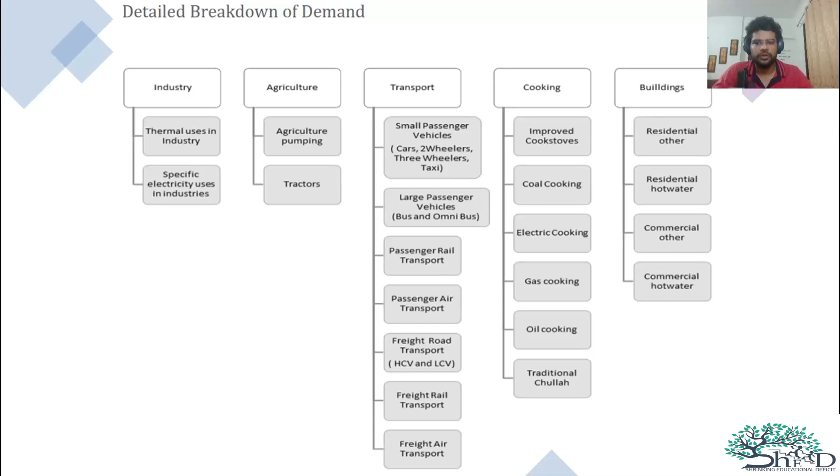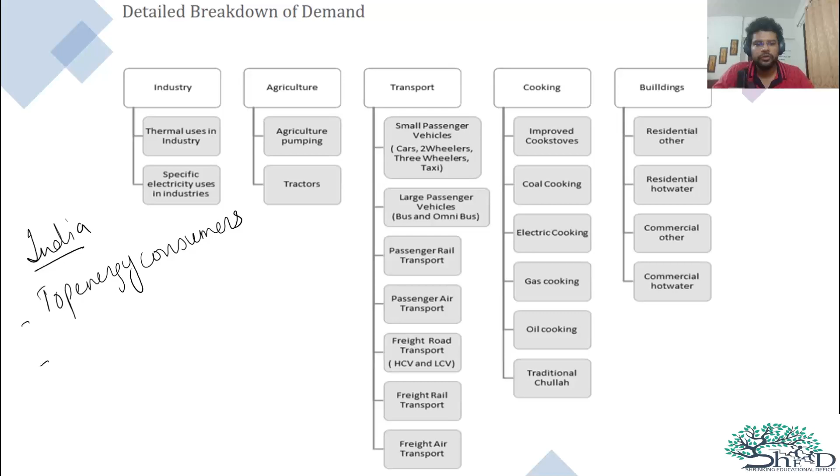Before beginning, I would like to give you some brief background, especially with regards to India. India currently ranks as one of the top energy consumers in the world, and with our population and GDP increasing, our energy demand will most probably increase in the next 5-10 years, and consequently greenhouse gas emissions will also rise.

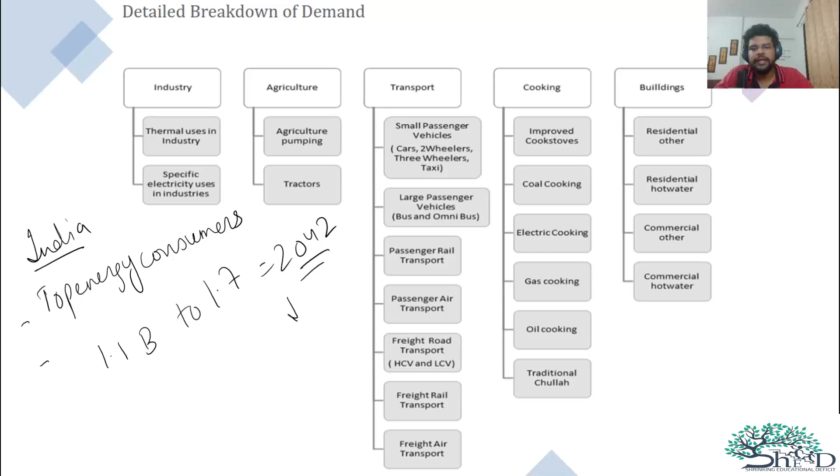Our population is expected to go from 1.1 billion to 1.7 billion by 2042. This is a United Nations estimate from 2017. And if we keep increasing our population like this, we will overtake China by 2025, which is also a UN estimate.

Now, most of this growth in population will happen in cities, not in villages, because of which urbanization will also increase. As seen here, it will lead to the following demands, which we'll see in the image.

So what is the result of this? Basically our energy consumption will increase - energy from agriculture will increase, demand from industry will increase, from transport will increase, from cooking, for buildings. Energy for construction and manufacturing will also be increasing in demand.

In industry, the demands will be from thermal uses or specific electrical uses. In agriculture, water pumping, tractors. And energy does not just mean electricity - energy means oil also. In transportation, we will see air transport, railway transport, freight transport, all increasing.

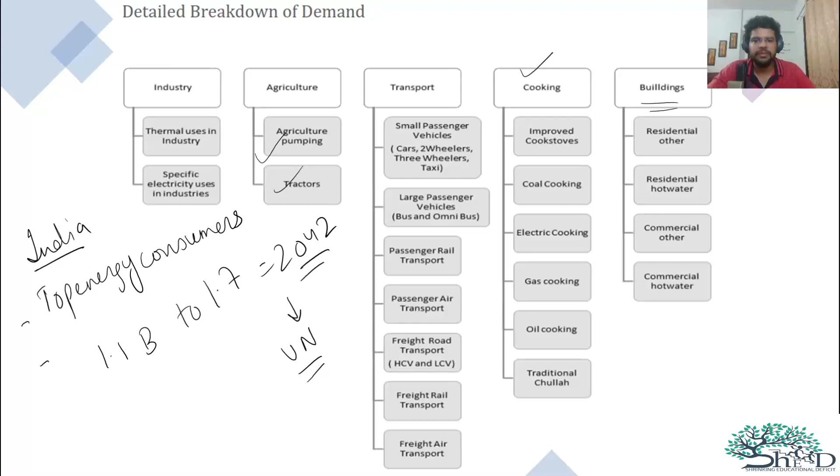In cooking, we will see less usage of coal, more usage of LPG, electrical cooking, and so on. In buildings, we will see residential, hot water requirements, commercial buildings with offices. So all these things will be increasing demand in the coming years. Please remember this perspective before reading anything related to energy.

But if we talk about renewable energy, our progress has been very nice, very good. We have seen a rapid increase in renewable energy sources. For example, from 2013 to 2019, wind, solar, hydro, and biomass have all increased.

Most of the growth you will see has happened in wind and solar. Almost the same growth is happening in hydro. A little bit of growth is there in biomass, but most of the growth has occurred in wind and solar, and most in solar. So that is what you can see from the graph. This is also something you can use in your arguments.

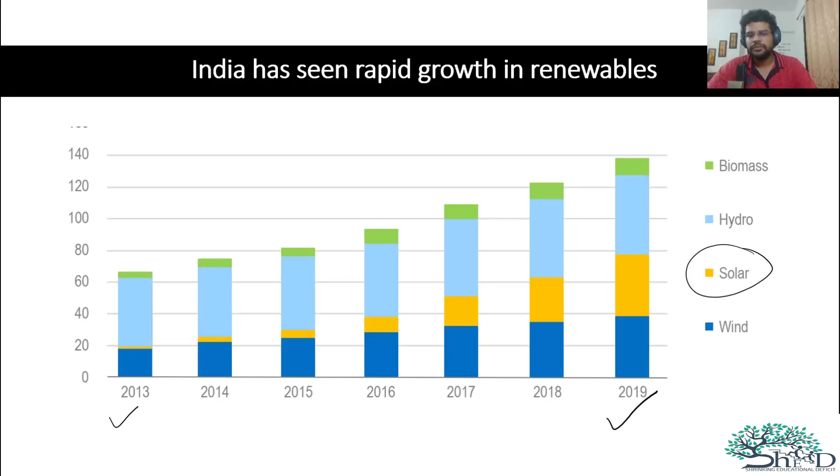So what are the recommendations for the overall India's energy sector? Now I'm not talking about any particular energy source, I'm talking about the overall energy sector of India.

First of all, we need to keep promoting the energy investments that are currently going on. We need proper regulation, proper foresight by policymakers. We need policies that do not change when the government changes - a stable regulatory framework for all players in the market.

We need to move toward market pricing for energy commodities, meaning subsidies should reduce. But this cannot be reduced for everybody - for some people who deserve it, they should still be provided with subsidies.

Prioritize action to foster energy security - meaning we get the energy we want whenever we want, without waiting for another country to provide it. The central government needs to work with state governments to increase renewables, and we need to boost the flexibility.

We need to improve our emergency oil storage according to international best practices. We need to create a natural gas market in the country with good infrastructure of gas, which can be done by increasing supply of LPG, petrol, and piped gas in rural and semi-urban areas.

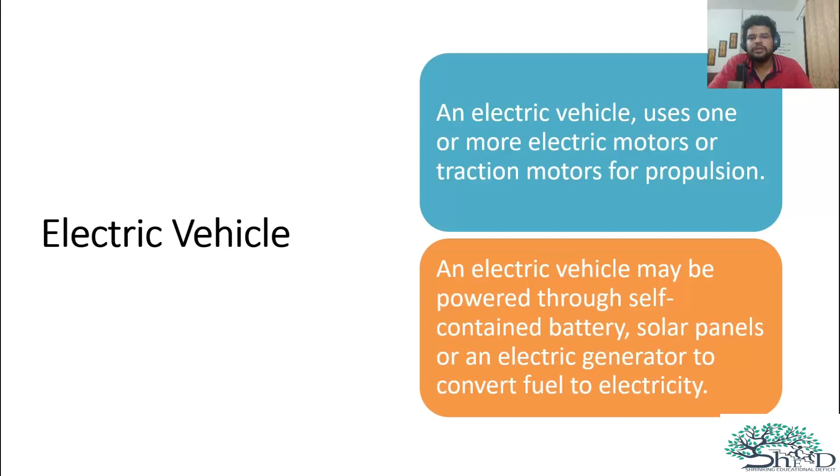It might be powered by batteries, or it can have solar panels also, or even a generator, so that it can use diesel or some other fuel to generate the electricity. We'll see the types of fuels.

One of the most important technologies in this is fuel cell technology. A fuel cell is basically a device that generates electricity by chemical reaction. Very simple definition - a fuel cell is a device that generates electricity by chemical reaction. It uses the chemical energy of hydrogen.

Fuel cells can be used in a variety of applications - they can be used in transport, in backup power, in cars, and even at some stage in the future they might be able to power your homes also.

Since we are talking about electrical vehicles - in cars, fuel cells can operate at a better efficiency than a combustion engine. That means 1 liter of hydrogen will produce more energy compared to 1 liter of petrol. They also do not have any harmful emissions. Hydrogen fuel cells emit only water, so there is basically no carbon dioxide emission, and the pollutants that create smog are due to combustion engines.

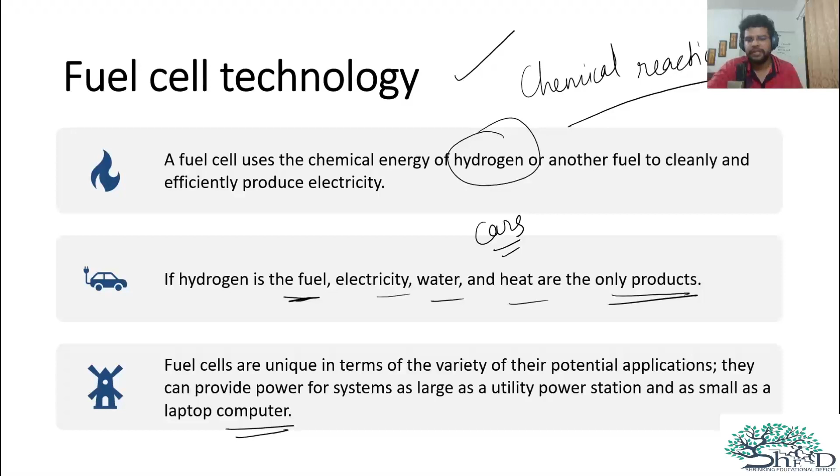They are very unique. They have zero pollution, very less noise, very few moving parts. So ultimately it is very beneficial to use.

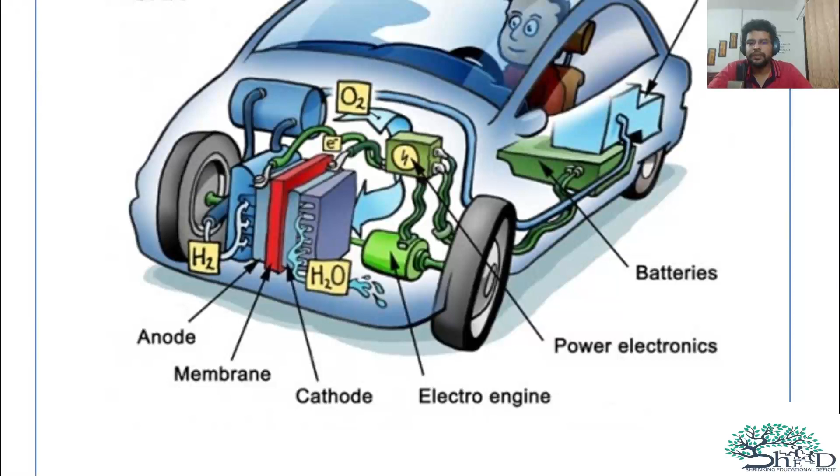Now let's see this image. Fuel cells will sit in a car like this. This will be the fuel cell that will produce the energy, and the battery in the car will store it, and the battery will keep recharging. At the place where the engine is, there will be the fuel cell, and that will produce the energy on the go.

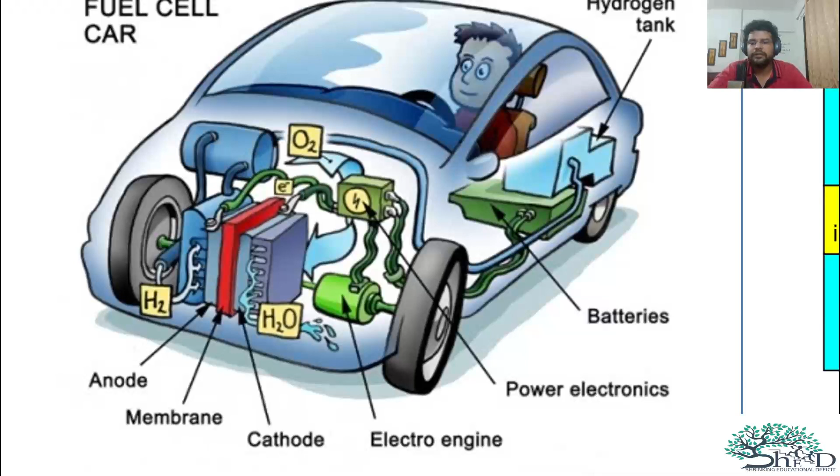For emergencies, the battery will be charged. Like nowadays, even scooties, cars, and bikes have batteries to start. Almost every vehicle today has a small battery, but that is used only in emergencies and for first ignition. But here, at the place of the engine, the fuel cell will be placed, and it will run whenever the car is running, with a battery also in case of emergency or if there is any problem in the fuel cell.

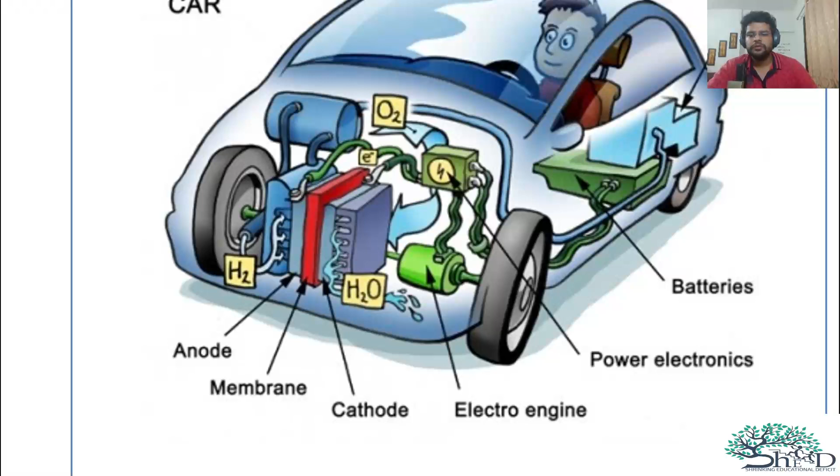So a fuel cell will work like a battery, but they don't get charged. They run on fuel - they produce electricity and heat as long as hydrogen is provided to them.

Now, in a fuel cell, there are two electrodes - see the right hand side diagram. A fuel cell has two electrodes, a negative electrode and a positive electrode. The negative electrode is the anode and the positive is the cathode. Between these, there will be an electrolyte.

Now let's talk about the fuel, which will be hydrogen. It is given to the anode and air is fed to the cathode. In a hydrogen fuel cell, there will be a catalyst at the anode, and it will break the hydrogen molecules into protons and electrons. These electrons will go to the cathode through the external circuit. This flow of electrons creates the electricity.

So hydrogen will be broken down and the electrons will travel from anode to cathode, and that travel of electrons will create the electricity. Now the protons will go through the electrolyte. As you can see in the diagram, plus ions will go through the electrolyte to the cathode, where they will unite with the oxygen and produce H2O. Getting the point? So this is how the fuel cell will work.

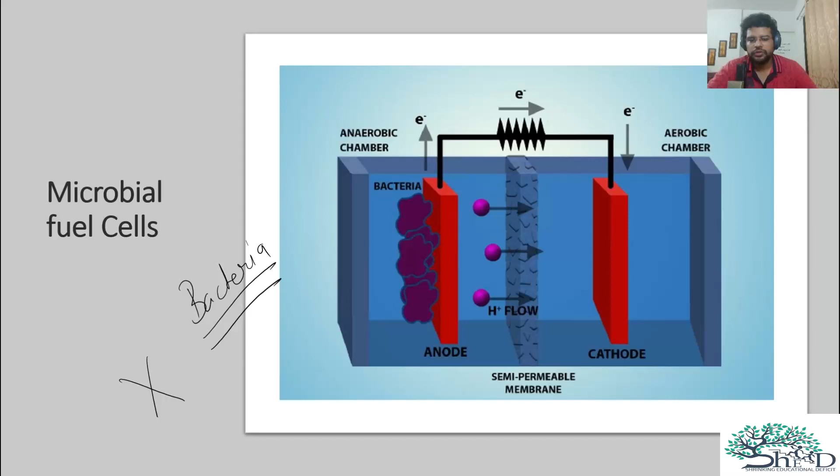Now related to this is the microbial fuel cell. In a microbial fuel cell, at the anode, we will be producing electricity from bacteria. The fuel will be bacteria and not hydrogen. So it is quite a new thing. Let us see how it works.

The Zoological Society of London has used plants to power sensors in the wild, in the jungle, by installing microbial fuel cells. They have installed sensors in wildlife to monitor them and to power that sensor in the jungle using microbial fuel cells.

A microbial fuel cell is a bioelectrochemical device—biological plus electrical plus chemical—that uses the energy generated by respiring microbes to convert the organic part directly into electrical energy. It transforms chemical energy into electricity by using oxidation reduction reactions.

We don't need to go into depth, we just need to see how it works from a high level, not chemically, since that's not part of our GS. It relies on living things to facilitate the movement of electrons. We just need movement of electrons. In the hydrogen fuel cell, it was done by hydrogen; here it is being done by a living organism.

Now, what are the various applications? Where low power is required and where replacing a battery is not very practical, microbial fuel cells can be used—for example, the sensors of the Zoological Society of London.

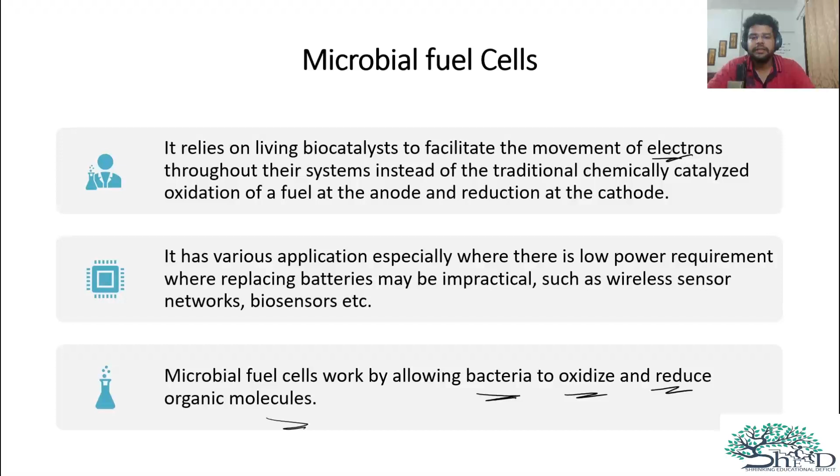Microbial fuel cells work by allowing bacteria to oxidize and reduce organic molecules. So this is how they work. Again, I'm telling you, we don't need to go into depth. We just need to know that such a thing exists, and it converts and starts the chemical reaction by a biological source.

Now, what are the advantages of a fuel cell electric vehicle? I'm not talking about the fuel cell now, but about the electric vehicle powered by a fuel cell. They produce very low greenhouse gases, and whatever byproduct they produce will not cause health problems. Fuel cells emit only heat and water as a byproduct, and are more energy efficient than traditional combustion technologies currently in use.

Fuel cell electric vehicles do not need to be plugged in for charging. This is very important—let me compare it to the vehicles existing right now. Currently, when a car runs on petrol, diesel, or CNG, it charges the small battery that is inside the car.

The fuel cell will basically provide current or energy to the vehicle like a combustion engine provides energy to the motor of the vehicle from petrol. We need energy to rotate the wheels, currently provided by the combustion engine. With the fuel cell, it will replace the combustion engine. It's not like a battery—it will actually produce electricity, and with that electricity the motor of the vehicle will run. Of course, there will also be a backup battery in the fuel cell vehicle, which will be charged and used in an emergency if the fuel cell stops working.

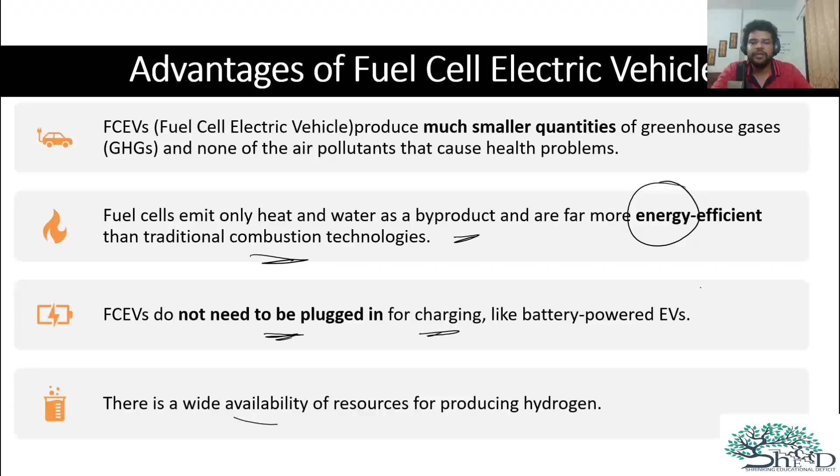And of course, we have wide availability of resources for producing hydrogen, so this is very good. Now, what are the limitations of the hydrogen fuel cell? If energy produced by hydrogen fuel cells is such clean energy, then why are we not using it? Why are we not producing this on a mass scale right now?

See, what are the issues with hydrogen fuel cell technology? The way we need to make hydrogen is mostly through electricity, and that electricity comes from fossil fuel. That is the issue. So we need to prepare hydrogen as a fuel, and that hydrogen needs energy. Basically, the process to create hydrogen needs energy, and that is coming from fossil fuels right now.

Secondly, safety, because it is quite explosive. If not kept properly, hydrogen is quite explosive. Then there is high surface area carbon, which will corrode the vehicle. Rust will come in the vehicle. Then platinum is used in hydrogen fuel cells, which is quite expensive, and its price is a big barrier in wide adoption of hydrogen technology. So these are the limitations: it is quite explosive, then it is corrosive, it is being produced from fossil fuel sources, and the platinum that is used is quite expensive.

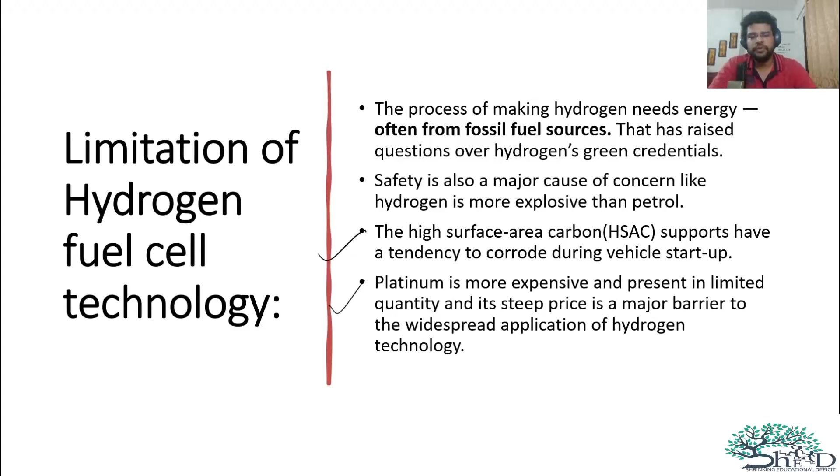So let us now come to the central government initiatives on electrical vehicles and what they are doing to promote electrical vehicles. Government of India has set a target of electrical vehicles making up to 30% of new sales of cars and two-wheelers by 2030. So basically by 2030, 30% of whatever is selling, two-wheeler or four-wheeler, should be electrical vehicle. This is the target set by the Government of India.

Then they want to build a sustainable electrical vehicle ecosystem, and initiatives have been taken for that, like the National Electric Mobility Mission Plan. This was launched way back in 2013, and it wants to achieve national fuel security by promoting hybrid and electrical vehicles in the country. Recently, I sat in a car which is Ertiga, Maruti Suzuki Ertiga. It is a hybrid car with petrol plus CNG, and it works very well.

Then there is a scheme which is FAME and FAME 2. FAME was launched in 2015. It also supports hybrid and electrical vehicle development and manufacturing. This scheme, FAME, is focusing on 4 areas: technology, demand creation, pilot projects, and charging infrastructure. So this is the first scheme, and this is the second scheme.

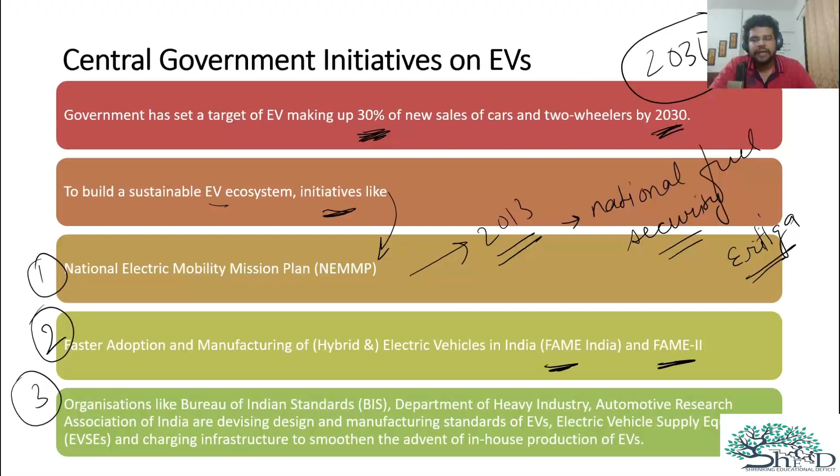Of course, it will then facilitate larger adoption and make people's life easier. For example, you are going on a road trip from Maharashtra to Tamil Nadu, then of course you would expect the same charging pin, same charging speed. So you will see the charging stations in your way, and you will feel secure that you can charge your vehicle on the road. This peace of mind needs to be there, and that will develop after development of this electrical vehicle charging infrastructure. But it has to be done in a way that the standards remain the same throughout the country. For that, central and state government needs to collaborate.

So what is the way forward? We need to have affordable, accessible, inclusive and safe mobility solutions in order to increase the ease of living in the country. This is very important because, as I've mentioned earlier, cities will be the next place where population growth will take place. We have to increase the ease of living in urban areas, and right now there are many urban areas.

In the next 20-30 years, a lot of new urban areas will be coming. If we start good planned development right now, like Chandigarh, in tier 2 cities or suburban cities or satellite cities, then we will be able to give people a good standard of living. They will have high ease of living, and then they can focus on productive things.

It is a known fact that many people spend a lot of time in traffic jams and traveling by unreliable public services. So we need reliable public services, we need less traffic jams, we need more productive time for people, because people will of course work. But if they are spending 3 to 4 hours traveling daily, which I have also done in my life, that basically leaves you with no energy to enjoy life, and then the happiness index also decreases.

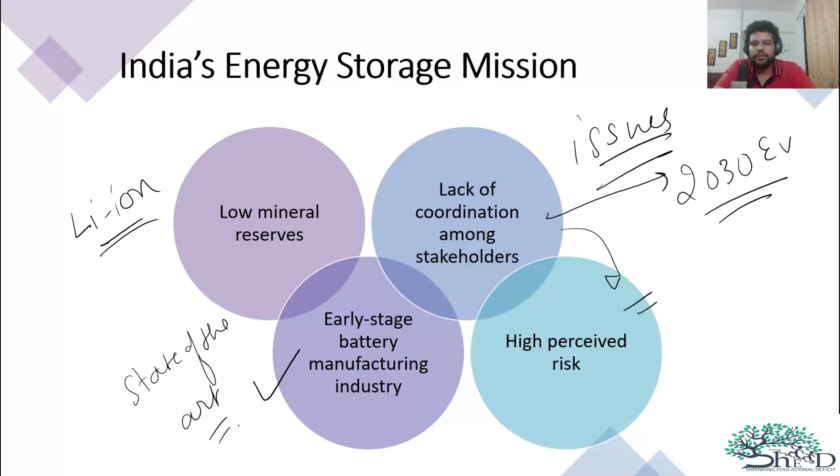So some concrete issues are there which we need to solve, and if we can solve them, we will get ahead of the world. If we can't solve them, at least we should minimize the issues that these points are creating. Quite an important mission, quite an important topic, please do revise this. Next, we come to the second topic, which is nuclear program in India.

India has a three-stage nuclear program, created by Dr. Homi Bhabha. The plan wants to utilize the limited uranium resources that we have, and the abundant thorium reserves that we have. So we want to create a balance, and a process in which we start from uranium but we end up with thorium, because India has a lot of thorium resources. This was formulated by Dr. Homi Bhabha in the 1950s to secure long-term energy independence of India. Very important keyword: long-term energy independence.

In stage 1, we will build pressurized heavy water reactor. Stage 2, we will develop fast breeder reactor. Stage 3 will develop breeder reactor. Now why 3 stages? Although we have 25% of the world reserves of thorium, by itself it's not a fissile material. We need to change it, we need to transmutate it to uranium-233 in a nuclear reactor.

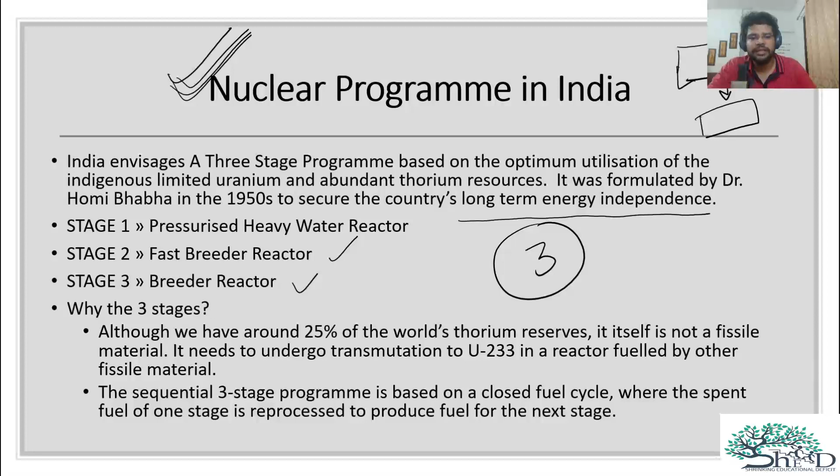This three-stage program is based on a thing called closed fuel cycle, because in these 3 stages, the fuel used in one stage is reprocessed to produce fuel for the next stage. Basically, the output of stage 1 can be used as the input in the next stage, then its output will be used in the next stage. So let us see what I just talked about.

Pressurized heavy water reactor is the first one, and its output is plutonium. Now the plutonium in the second stage will be used with uranium to produce U-233. Now this U-233 from the second stage will be utilized with thorium to produce energy. So you can see the flow like this. This is the very interesting thing about India's nuclear program, quite a unique program in which the plan was made according to the resources that we have.

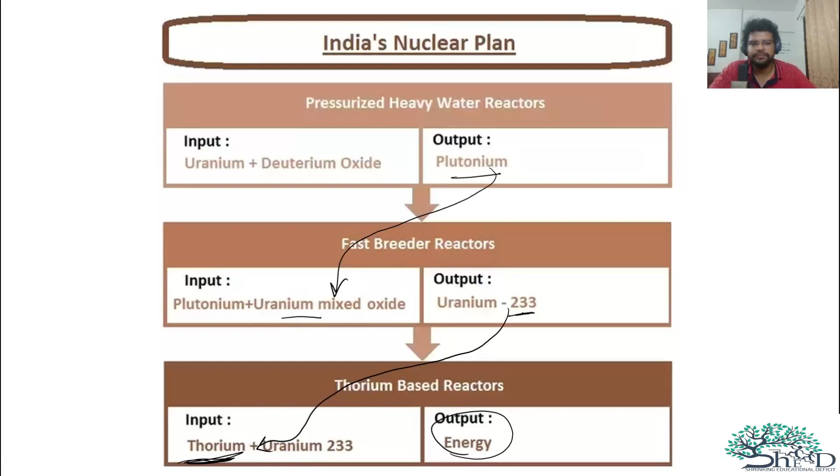Now let us briefly see what are the challenges in the three-stage program. First challenge is safety and waste management. This is a challenge in every nuclear technology. Incidents like Chernobyl, Fukushima are serious cause of concern.

If we generate nuclear energy and follow the highest safety measures, there is less possibility but still some accident will happen, and it has happened. But these are very few in number, and most of them happened because of human error rather than the nuclear fission reaction itself. A lot of research is done before installing a nuclear reactor, like earthquake and environmental factors, before even thinking of establishing a nuclear power plant.

Next is availability of fissile material, which is also a cause of concern, because nuclear fuel is not easily available in the world. It needs a lot of diplomatic efforts, like the US-India nuclear deal.

Third point is land acquisition and selection of location for a nuclear power plant is also a major problem in our country. For example, we saw this problem in Kudankulam in Tamil Nadu, where it was delayed a lot because of land acquisition challenges.

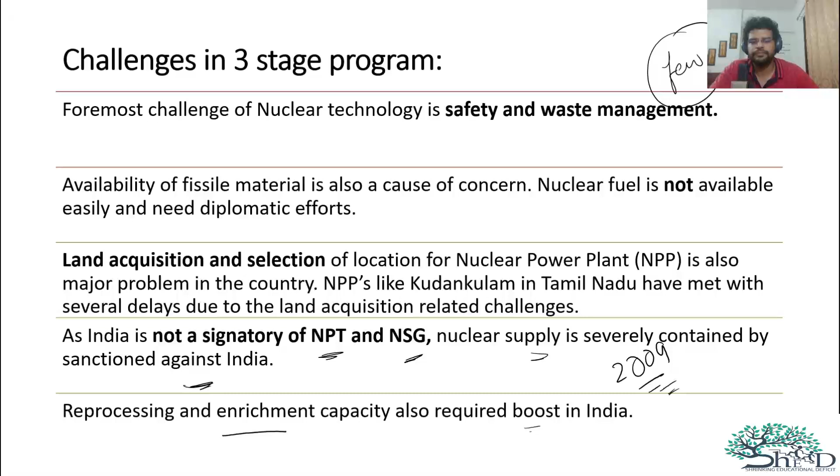So what is the way forward, what are the solutions? To ensure safety and security, we need good skilled engineers and excellent, cutting-edge regulation. Secondly, we need to create facilities for waste disposal and management.

Nuclear energy's biggest concern is safety. Second is the disposal of nuclear waste which is generated. This is very important, and we need international agreements to get the technology for waste disposal and management.

Third point, India needs to create nuclear energy as a sustainable energy source, because nuclear technology is the future. France has shifted almost totally to nuclear energy and uses very few fossil fuels. Similarly, we need to do this for the sake of our country, our energy security, and our world.

We also need to maintain and reinforce international non-proliferation agreements, so that the fuel used by countries is not used for weapons. We need to use nuclear energy only for civilian purposes, and to increase the production of energy in the world.

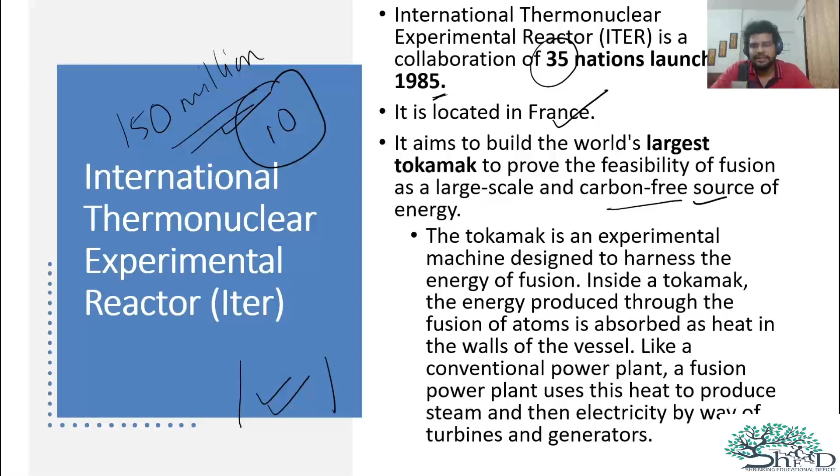Now, officials say that this nuclear fusion reaction will be the most complicated machinery ever created by humans. It will have very big, almost the world's largest superconducting magnets, because we need a very strong magnetic field to contain the plasma. Plasma is one of the states of matter we discussed in Bose-Einstein condensate. Plasma will be generated because the area will reach temperatures like 150 million degrees Celsius, basically 10 times hotter than the center of the sun. So the air around will turn into plasma, and we need very strong magnets to contain it.

So this is how it currently looks. It is being developed in France.

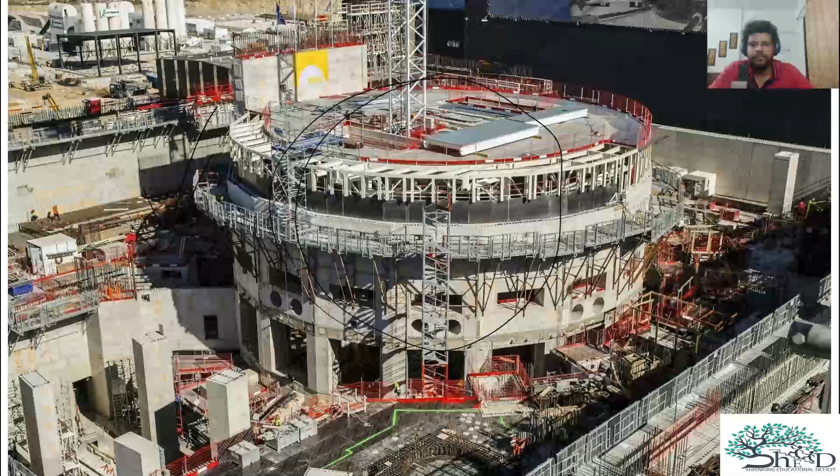Now, what is the contribution of India? India had joined this project formally in 2005, and it is responsible for delivery of a lot of components like water system, cooling water system, cryogenic system, and so on. We don't need to know that in detail. We just need to know that India had joined it, and the effort India is giving, in monetary value, is around $2.2 billion.

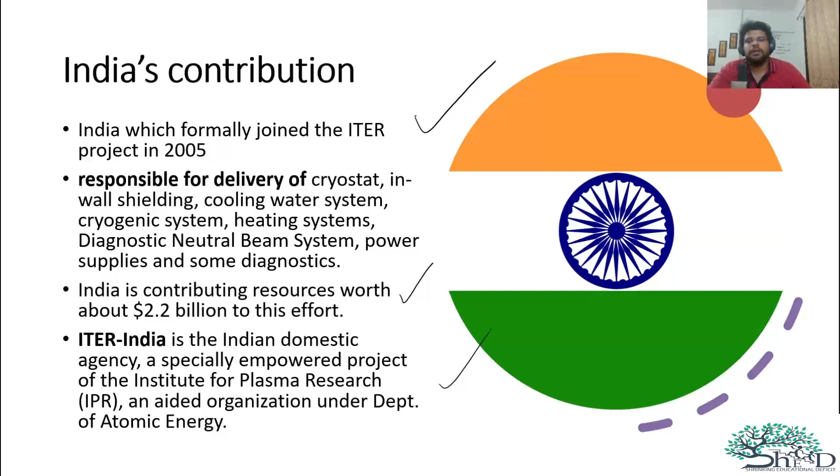Now, ITER India is the Indian domestic agency, which is a specially empowered project of India's Institute for Plasma Research. This is an organization under Department of Atomic Energy. So we have taken significant steps to join this organization, because nuclear fusion, if it is harnessed, will change the world. It will lead to unlimited energy.

Just imagine we have a small sun with us. If we are able to produce energy safely—because nuclear fusion is dangerous, you can't easily control it. Nuclear fission is very easy to control, but fusion is not. As you saw, temperatures also reach 150 million Celsius, due to which nuclear fusion is very powerful. So we need to create a lot of precautions to control it.

So this quotation is there on the ITER site. It says: fusion, the nuclear reaction that powers the sun and the stars, is a potential source—remember, potential source, it is being researched, it is being worked upon, it is not currently a viable source—of safe, non-carbon, virtually limitless energy. Harnessing fusion's power is the goal of ITER, which has been designed as a key experimental step between today's fusion research and tomorrow's fusion power plants.

So this machine which is being created right now is an experimental reactor. If it works, then fusion reactor power plants will be created in the next 50 years. So if we can crack this fusion energy, we can get huge carbon-free energy.

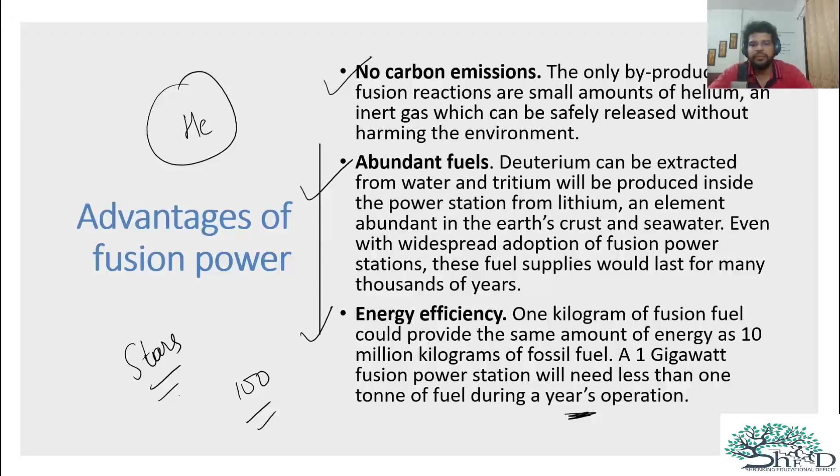Efficiency in the production of energy: 1 kg of fusion fuel will give the same energy as 10 million kilograms, that is 100 lakh kilograms, of fossil fuel. A 1 gigawatt fusion power station will need less than 1 ton of fuel during a year's operation. So it's just incomparable, the energy efficiency is just incomparable. Fusion wins all the time.

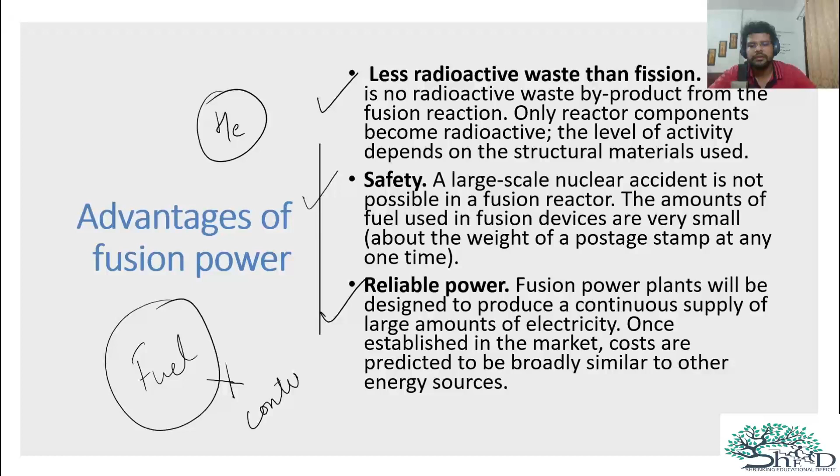Got it? So what is the perspective? Now this is the last topic of our series. After this, our science and technology series will be over. So what is the final perspective of this topic?

By the end of this century, energy demand will easily triple or even increase by 4 times because of population, because of urbanization. Developing countries will also develop and they will demand electricity for their areas. So relying only on fossil fuel is not a smart strategy for the future. We need to increase energy production in an environmentally friendly way, and we need practical alternatives to non-renewable energy. Of course, a lot of countries do not have fossil fuels like us - we import our crude oil.

That is why this project becomes very important for India also. Fusion energy is a great opportunity for India to meet its energy needs in the future. Of course India is already working on a lot of fission reaction nuclear power plants, but this fusion reaction, if developed, can make countries, and the world, independent from fossil fuels. So although fossil fuels have brought us till here, going into the future we need nuclear fusion energy, not even fission, we need fusion energy. Because if that is achieved, limitless energy can be created.